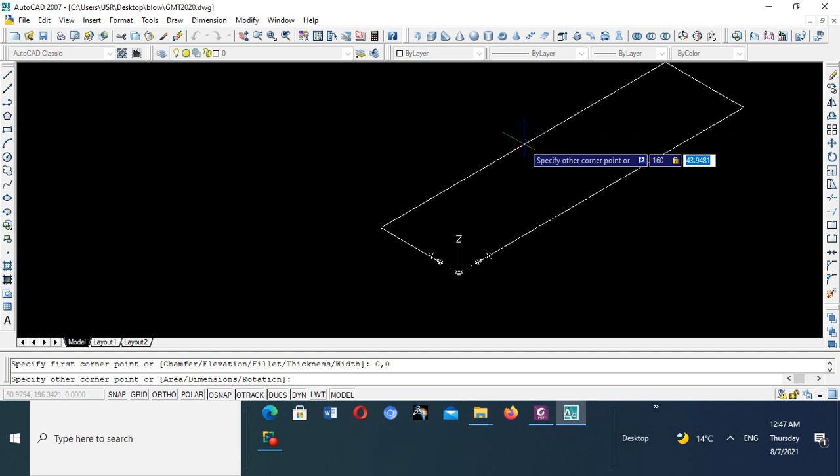Then what is our other corner? It is 160 by 70. That is the other corner. There is your rectangle, right?

So we don't use any 3D command, we just use 2D commands, because this semester we are learning only 2D. So check, you will come to Line, draw a line here. You click Ortho on to make sure you pick your views easily. And here our height, what was the height? Let me check again, the height is 60. So here I write 60. Enter, right? Then I can come out of that command if I want.

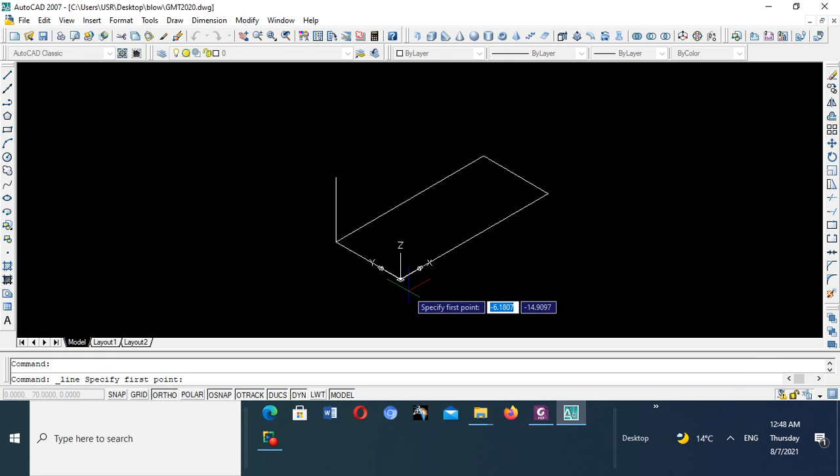I go again to Line, come here, another line in Ortho, 60. Enter, right? Come out of that line, then here again another line, so many ways of killing a cat. 60. And you know, when you practice, you learn more efficient ways than what I'm teaching you. Here another line, what is its length? 60, right? So we've got this, so we can join them.

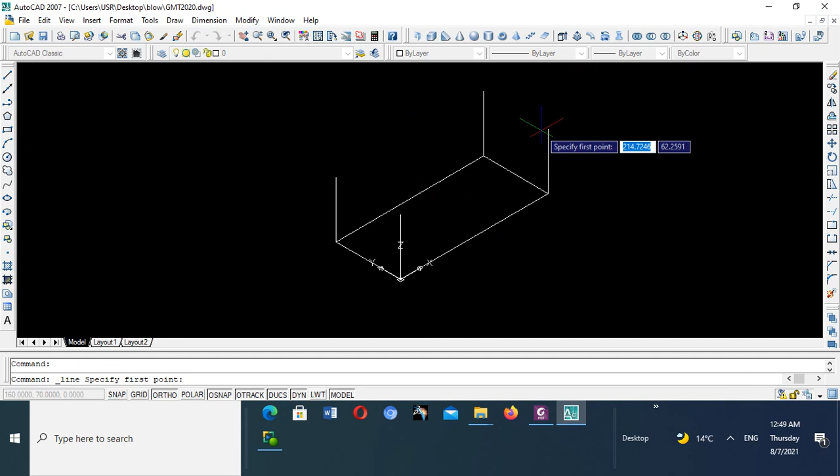Join this line, we join it to that line, join that line, ortho on that line, that line. Then we've got our isometric box, right, which measures 70 by 160 by 60, which is this one.

Correct? Now we want to draw this top view on the top of the isometric box. So we start with that, and we just want to evaluate certain key coordinates, like the center of this circle. This is 20, this is 20, this is 20, this is 50, 50.

So 20 plus half of 50 makes it 45. So the center of this is 45, and then this one is 45 from the end. So 45 from 160 is 115. So from there to that center, the circle is 115. You all have a common center in this direction, where it's half of 70.

So we come to AutoCAD, check. Now our UCS, which is called User Coordinate System, which gives us the origin of all coordinates, the 0,0,0 for all coordinates, is this one. So it's called User Coordinate System. There's a World Coordinate System. The world coordinate system is the default 0 of the software. The user coordinate is a choice, a place on your drawing that you want to use as your 0 for your convenience.

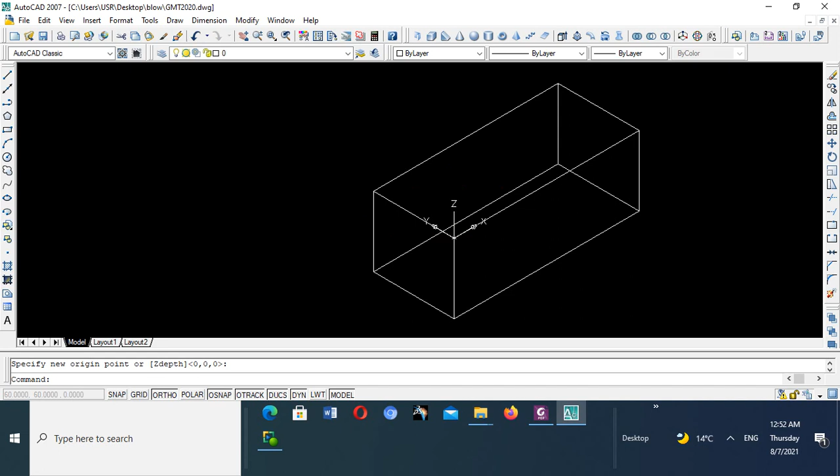So I want it to be here. What do I do? I type UCS in the command line, enter. Then it gives me options of what I want to do. One of them is M for move, enter. Then it says specify new origin. This is the new origin. There I can now start drawing these features. Check now.

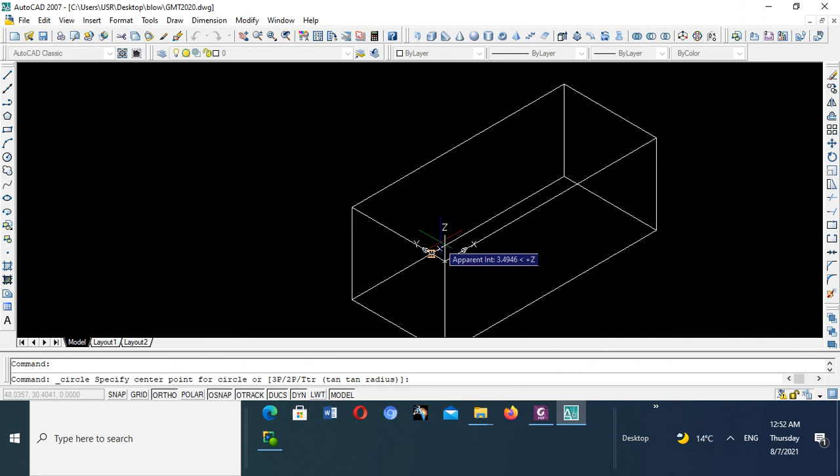I'll go to AutoCAD. I've told you already the centers: this is 45,35, this is 115,35. So we go to AutoCAD, go to circle, and it asks for its center. It is 45, 35. We enter, then the radius comes here. It is 25. Enter. Are we correct? Yes, we are correct.

Then we draw the second circle, which is 115 from the origin in terms of x, and 35 from the origin in terms of y. As taught before, when writing coordinates in AutoCAD, you click circle and write the coordinate of the center point. You write the first coordinate, x, which is 115. Then you press comma, so it gives you the opportunity to write the second coordinate, which in our case is 35 in terms of y. Then you press enter and it goes there. Then your duty is just to write the radius, which is 25.

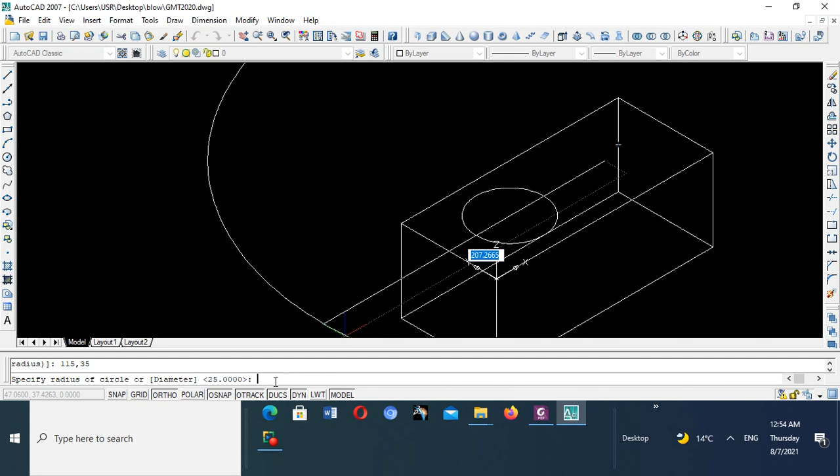You go enter, there is the second circle. But you find out that this circle is forming the top circle. When viewing these things in isometric view, you should see that part to show that it's a through hole. So we must draw again these two holes, which are offset from that top layer of holes, offset 20 down to show that it's a through hole.

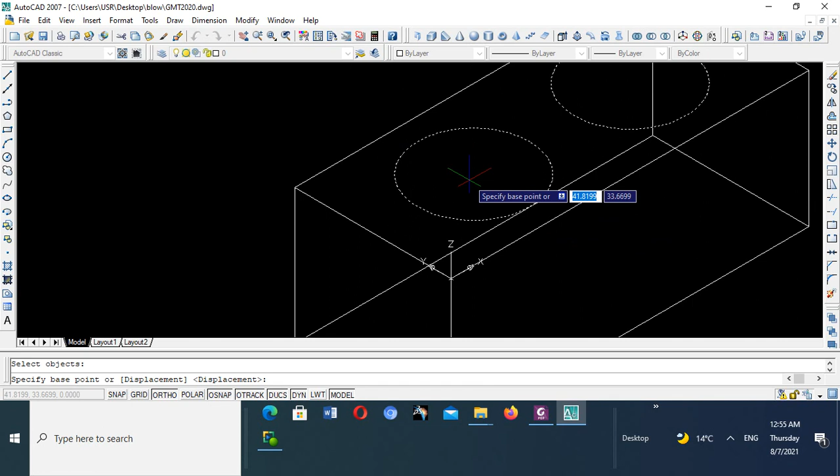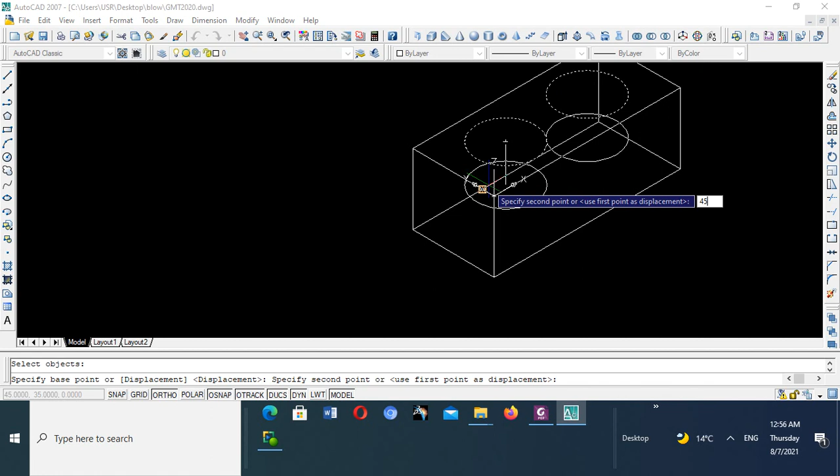So we come to AutoCAD, take this, we say copy, copy this and that, and say enter. Then it says specify base point, the point of reference. It's not picking this one - why not? We do the center of this one. Okay, you can pick the center. Now it's come to this center. Then second base point - we wanted ours to come down here. In terms of x and y, the base point does not change, so it will be 45, negative... 35. The z now is changed to minus 20.

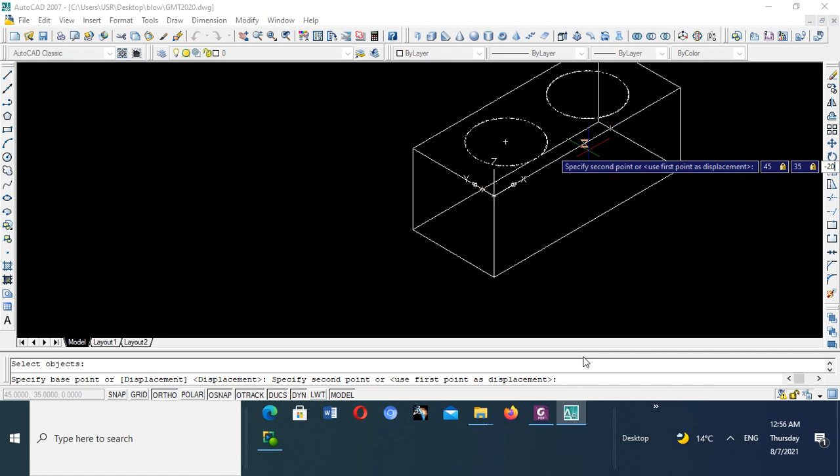Enter. There is your... then you say escape. There are your circles, which have been offset from the original position.

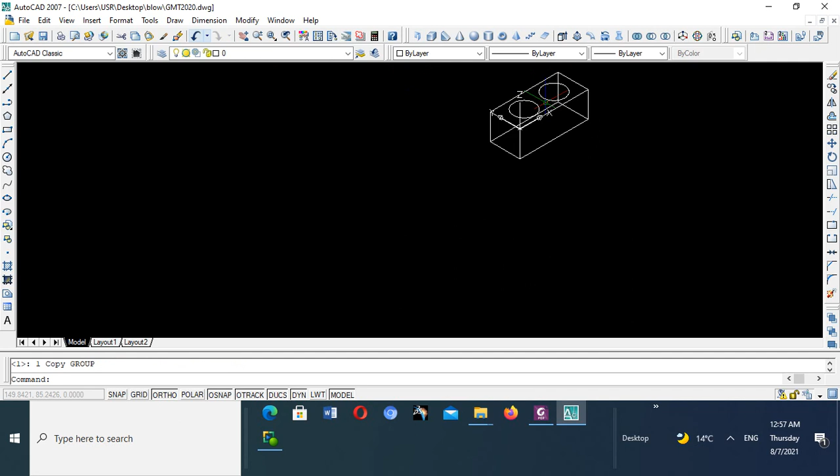Let me undo that so I can start again, so you can easily see what I'm trying to say. I want to offset that, I want to copy that. How do we copy? Let's go one by one. I want to copy this, enter.

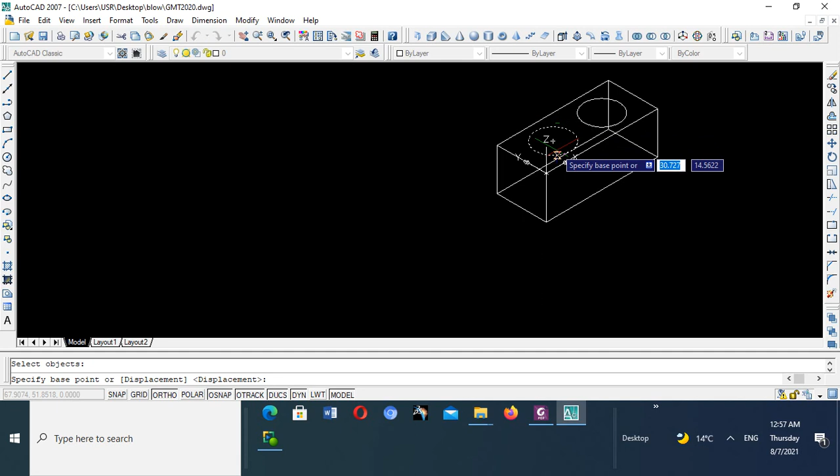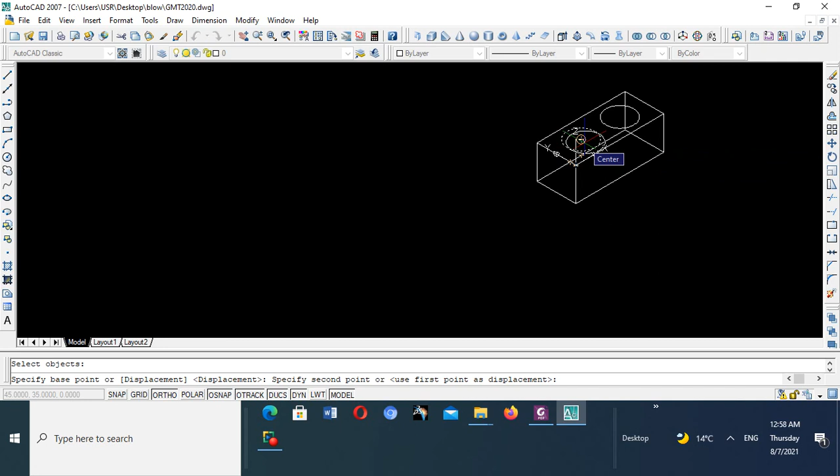Then we want to do the displacement, the point of reference is this one. Then we want it to go down to the new second point. So we specify the second point, going down. We specify second point in terms of coordinates, the new coordinates of the point. So the displacement must be 0... no, displacement, so it will be displacement second point, or use first point as displacement. So second point will be, in terms of x, it is 45. In terms of y, it is 35. In terms of z, it is minus 20.

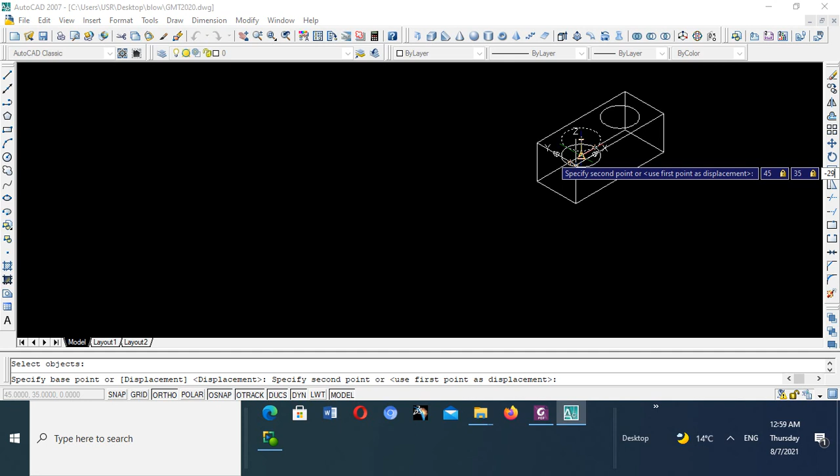Is it gone in that direction? No. Let's give it a try again. Let's see, give it a try again.

Now the best way to draw these two circles - this one we've already drawn, these two. I want to draw this one and this one. Now the best way to do that - so many ways of killing a cat. I told you, you can come to AutoCAD and move your UCS so that it is 20 millimeters below, because we know that this second series of circles is exactly on this edge, which is 20 millimeters below. So we come, this is our UCS, this is our 0, correct? So we want to move it in the same position as far as x and y is concerned, but drop z down.

So we go UCS, enter, move, enter. Then you specify new origin. So you go x is 0, comma, then y is 0, comma, then z is minus 20. You go enter. See, now it has gone down. This one is easier to work with.

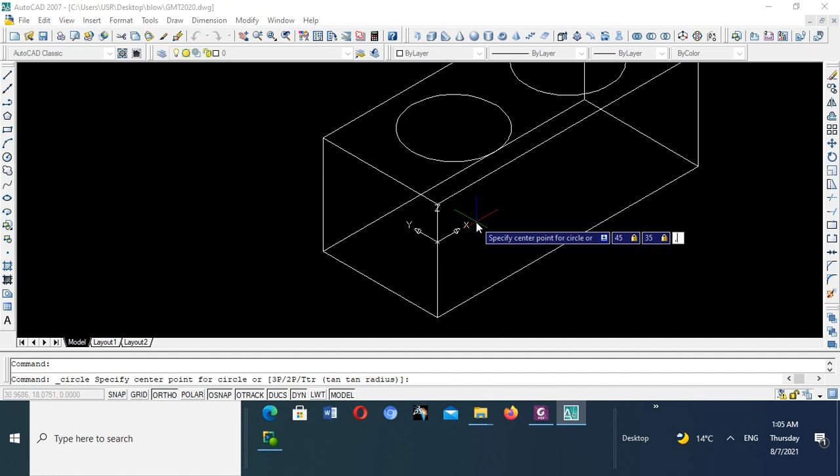It's 0. And there is your circle. Now we want to enclose it with radius 25, and there is your second circle. Correct?

Right, check now. You want to draw this circle we've drawn. We want to draw this one. This we've done, we want to draw this one. So we go to AutoCAD, go again to circle, then want to put coordinates on it.

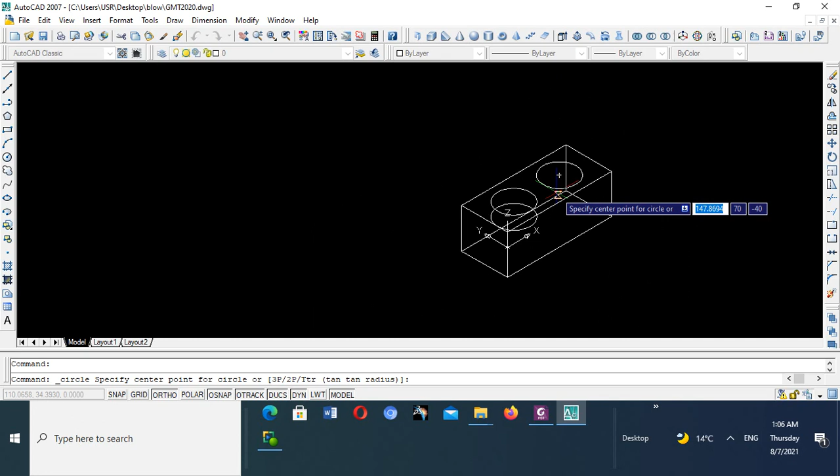What does it say? It says specify center, it will be in terms of x 115, comma, then y is 35, comma, then z is 0, enter. Then we want to specify circle radius, which is 25, enter. These are our two circles.

So two series to show the top part of the circle and the lower part of the circle, which makes it a through hole, this part here. The top part, lower part, making it a through hole, this hidden detail here. See this here again, this hidden detail is those edges, right? Anyway, you hide detail from your manual drawing.

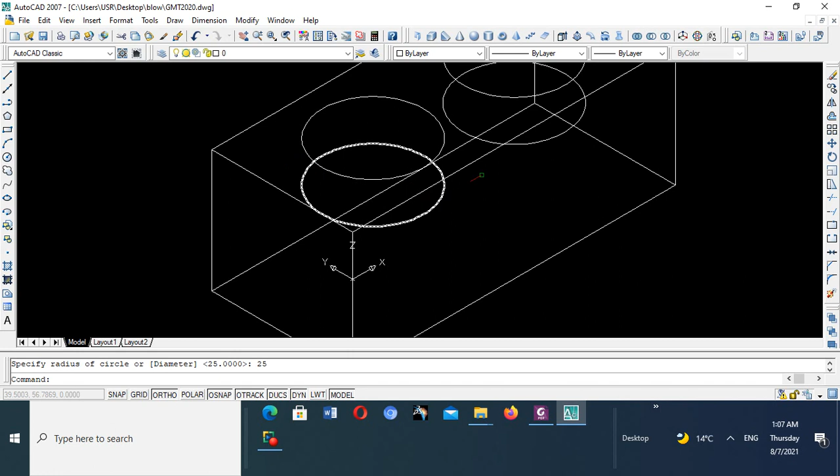So you come to AutoCAD. So you see, we don't want this part of the circle. It's not visible in isometry. This part only visible is the one inside. So what do we do? We should trim off that.

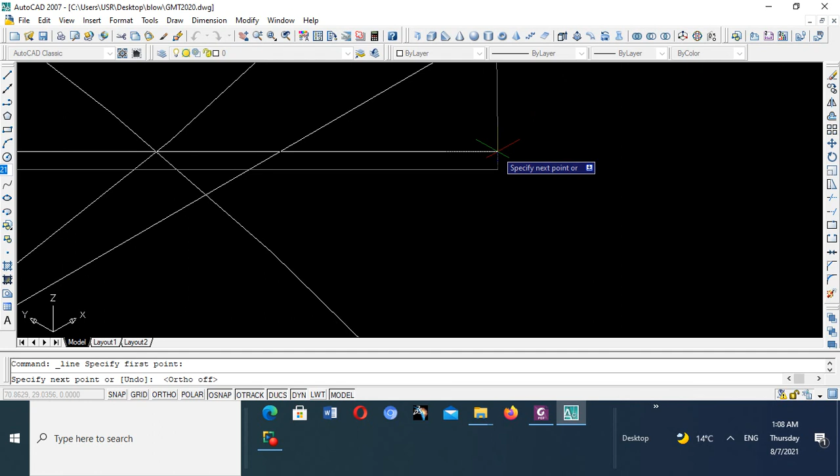So the trick to trim off that, you can just draw a line here which crosses from this point. It crosses - we put ortho off - it crosses over this junction here. You see why I put that line? I'm going to use it very soon.

So I only want to keep that part of the circle, which is the inner part. This outer part is not visible, so I want to delete it because it's not part of an isometric view. So we go to trim entity, and then they say select cutting edge. This is the cutting edge.

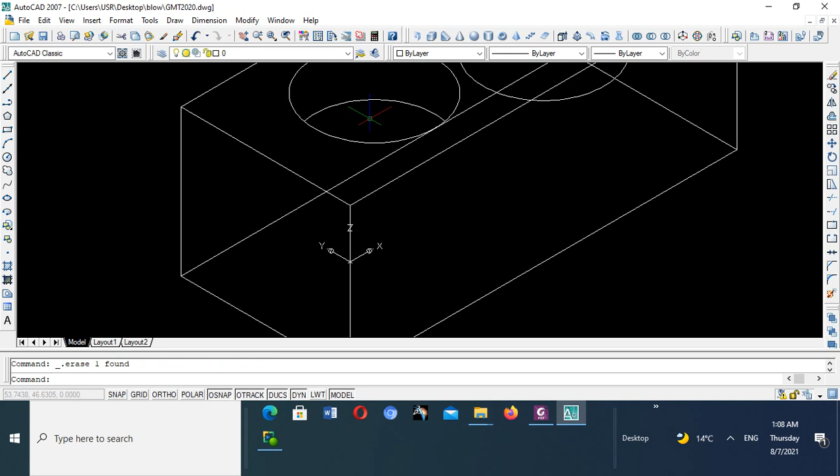Then we say enter. Then select what you want to trim. This is what you want to trim. That's nice, so we have removed it. So this line, we don't need it again at this time. So you see your circle has come out nice.

Very nice. Alright, same thing will come here. Just draw a line. This line is going to be our cutting edge, just need it for cutting. After that, we remove it. It must exactly cut past this.

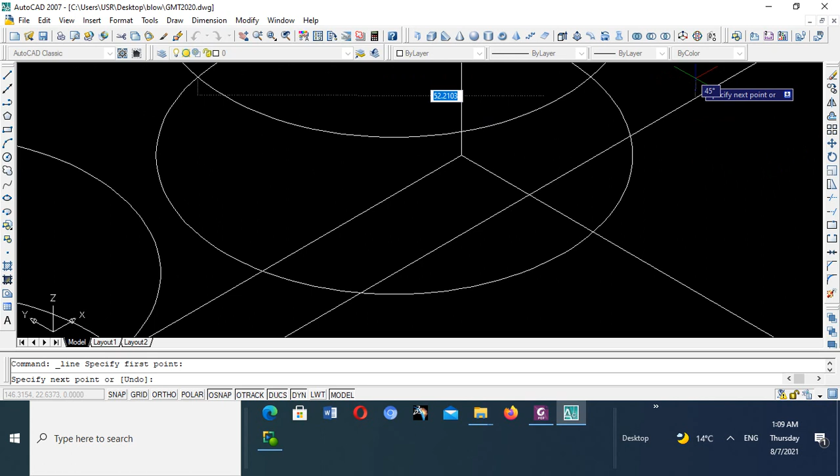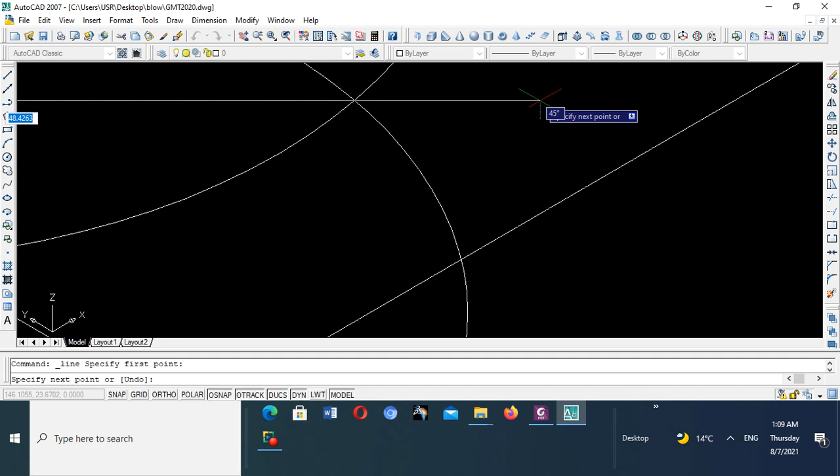Is it cutting past? If it doesn't cut past like what it has done, we should delete it. It won't save us any good. We should delete it, delete it, and we draw a line which really cuts exactly past. Right? This is our line cutting. Let's cut past our point of interest, right?

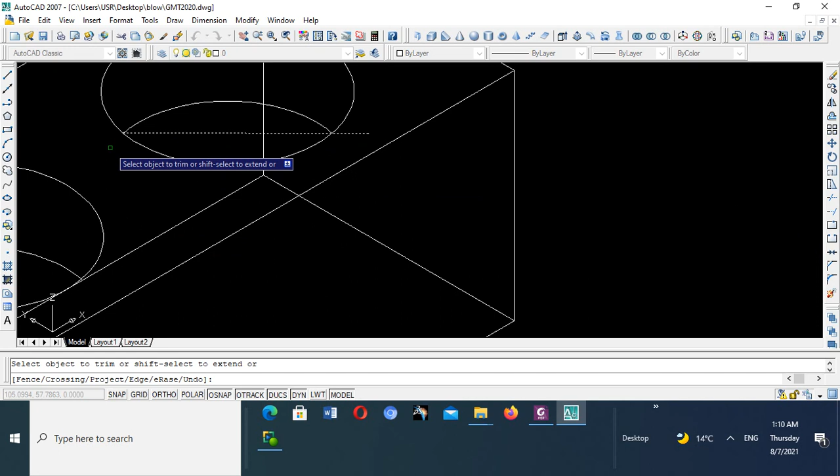Good. Then what do we want to do? We want to trim this outer, which is this one. We want to remain with that one, that one. So we go to trim, and we say select this, this is the boundary, cutting edge, and then you want to cut this. Nice, then you want to remove this, it's not part of our drawing. So we zoom. Nice.

Then also you want to believe with me, this part of the rectangle is not visible. That part is not removed, so we remove that. We remove, start with this one, we remove it. Very easy to remove, it's not visible in isometric. You can see here, those edges are not visible, so we want to remove them.

This is one entity, so we want to explode it. I taught you how to explode. Now we can remove this, delete. We can remove this, delete. We are nearly home. Nice.

Then we want to draw features on this side, which is this - a hole-like part of the bracket, which forms part of the bracket, just a through opening in the bracket. So we must draw these lines, then later we trim them and leave out necessary lines. So we want to draw in this front plane.

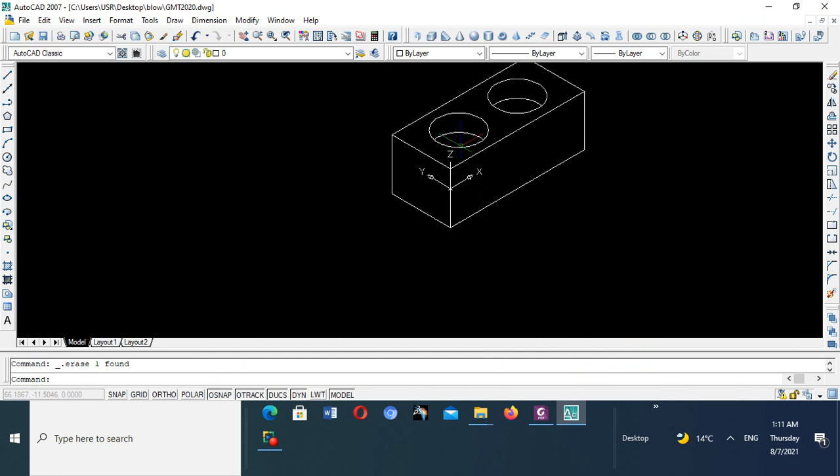So we have to bring our UCS so that our XY is in this front plane. So check how we do that.

We go to UCS, enter. Then it says specify new origin. You specify this. Then it says select a point on x-axis. This is my x-axis. Select a point on y-axis. This is my y-axis. Check now. My xy plane is this. This is my 2D drawing plane.

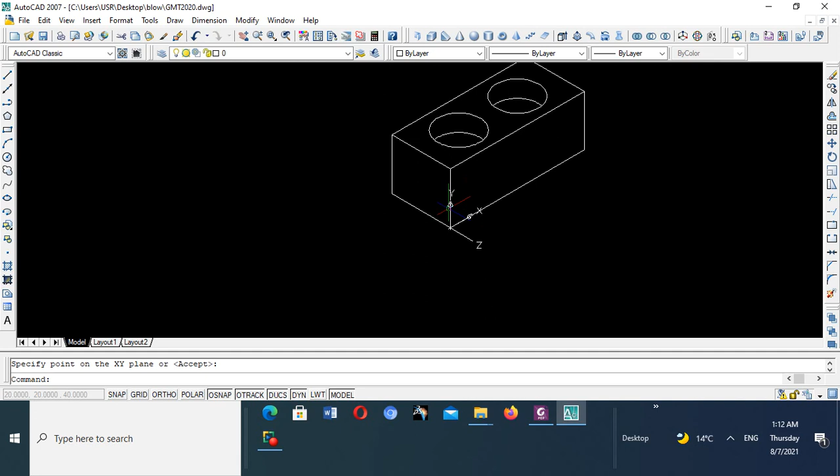XY plane, before it was this, now it is this. So I will repeat the process. You see where my XY plane was. Now I want to move that plane, so I click. You watch carefully. I type UCS, enter.

Right, specify origin. This is the origin. You see my XY plane where it is, but I want it to be on this vertical plane, it's on that horizontal plane, the base. So it says specify a point on X. This is my selection. Point on Y. This is my selection. There is my XY plane.

Now I can draw in that one. Check, I can draw in that plane now. See, that's how my circle has become, because of that selection of the new drawing plane.

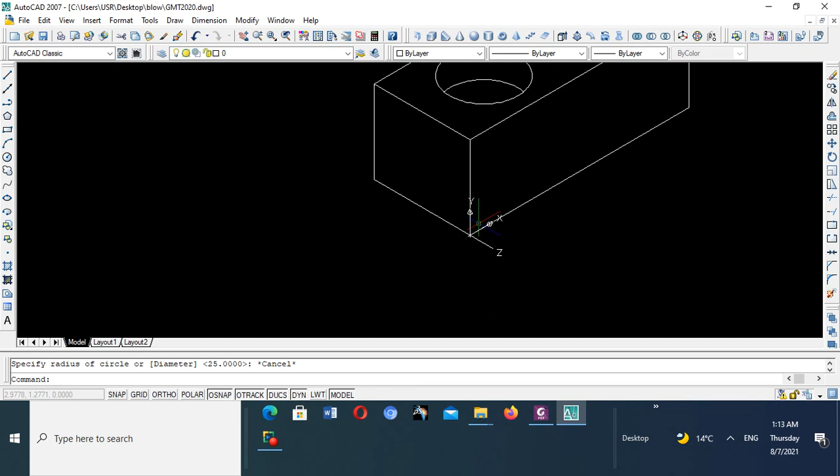Now I want to draw these lines, and later I trim them. You watch. This is 20 mils, this is 50, this is 20, this is 50, this is 20.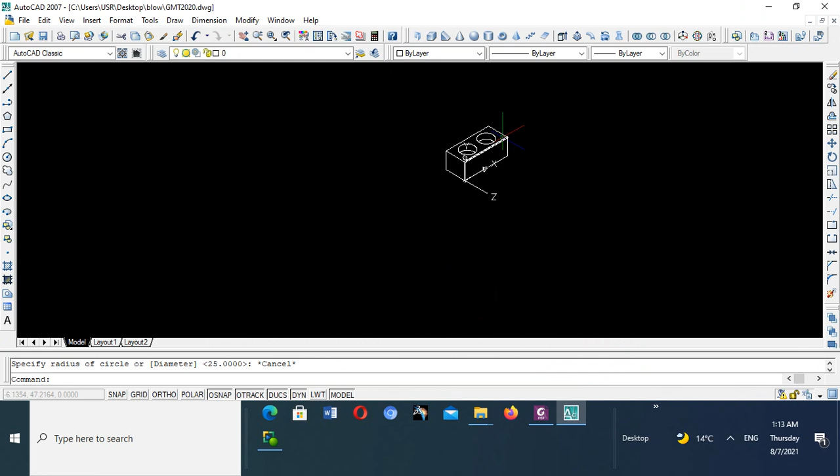So I will just offset. I come here, I choose this single line, I go to offset command. It says offset distance 20, select this, that. I come out of that. Then I go to offset again, offset distance 50, I say enter, I select this. Then I come out of that.

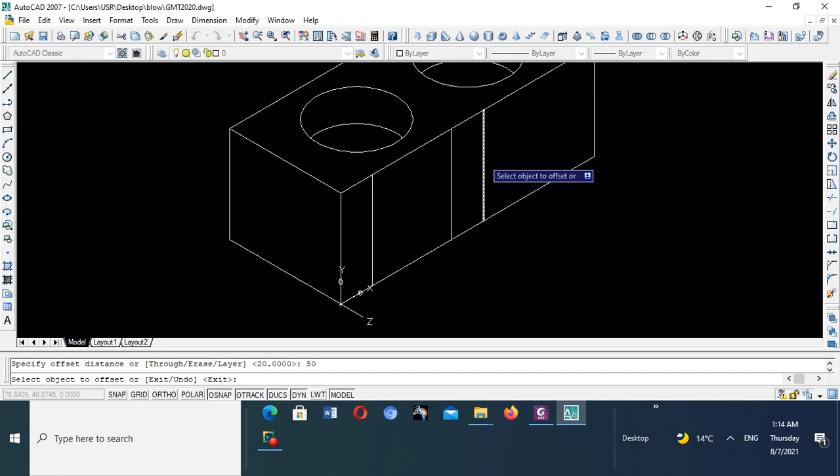I go again, offset distance 20, and I go from there to there. Then I go again, offset 50 this time, I go enter and I press this to that. Then I've drawn the necessary lines. I will trim them later.

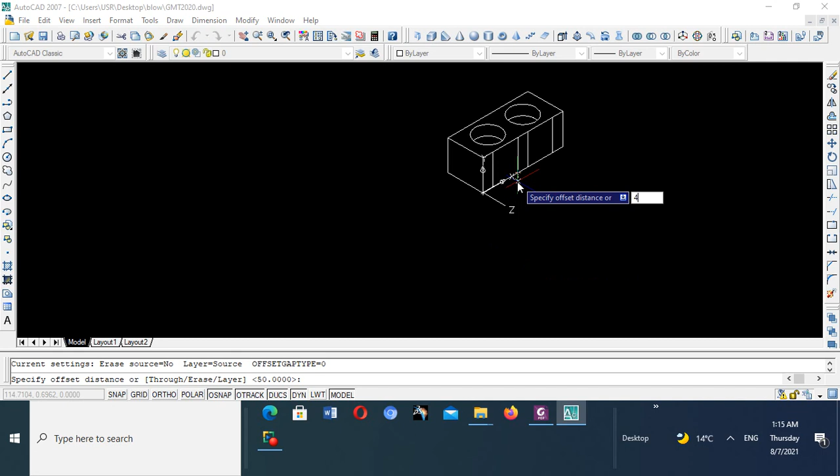Then I want to offset this line. So I go to offset command, offset distance from the bottom here to there must be 40, because this is 60 minus the 20 makes it 40. So I come to AutoCAD, offset distance is 40. Then side, this side, there is my lines.

So I trim off all those which I don't want. Right? All this stuff I don't want, it's not part of my drawing. So I will go to trim.

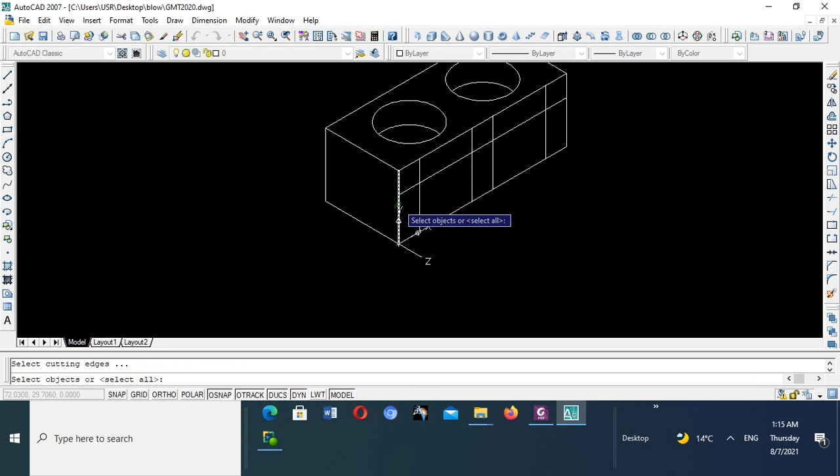Then which are the cutting edges? First of all, I want to trim the horizontal lines that are supposed to be trimmed. You will see. Then I go enter. So which one do I want to trim?

I want to trim this, I want to trim that, and I want to trim that. Then I come out of trim. Can I trim this? Yes. I can also trim this. Yes.

Then I come out of trim. Then I want to trim that. I don't know if I'll be able to do that. Then I go to trim. This is my cutting edge, this becomes my cutting edge. Then I go enter, and I want to trim this one.

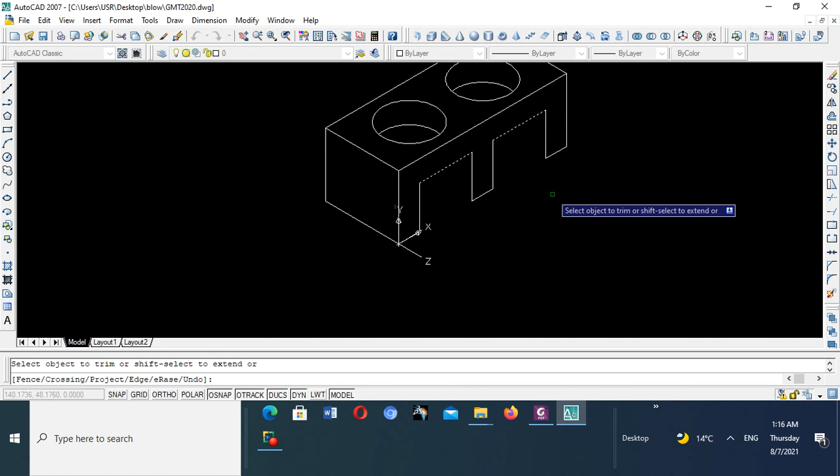I want to trim that one, I want to trim that one, that one. Then I come out. Nice, very nice. Then if it's isometric, this edge should be visible.

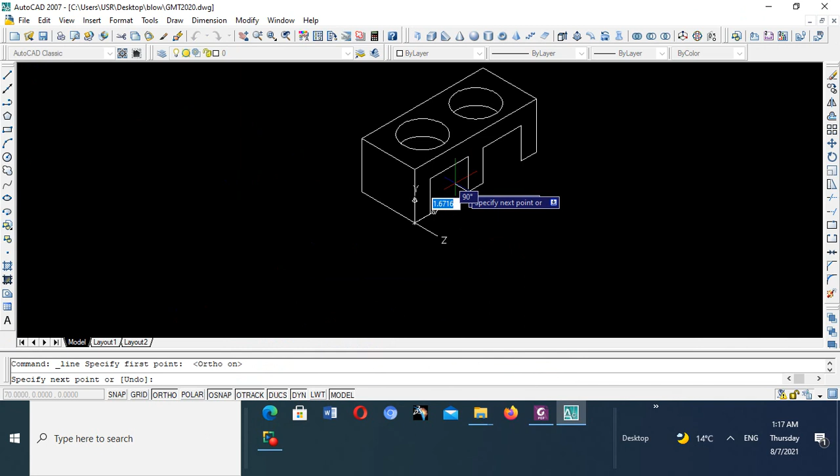That edge should also be visible. So I just go to AutoCAD. I pick a line, I go ortho on. And I draw this line. It must cross where it interferes with this. That's why I click it. Right?

Then I come again to line command, and ortho must be on. I click this where it meets with this, or even if I don't want to draw it, I can just go ortho, it goes there, so it does not disturb my accuracy.

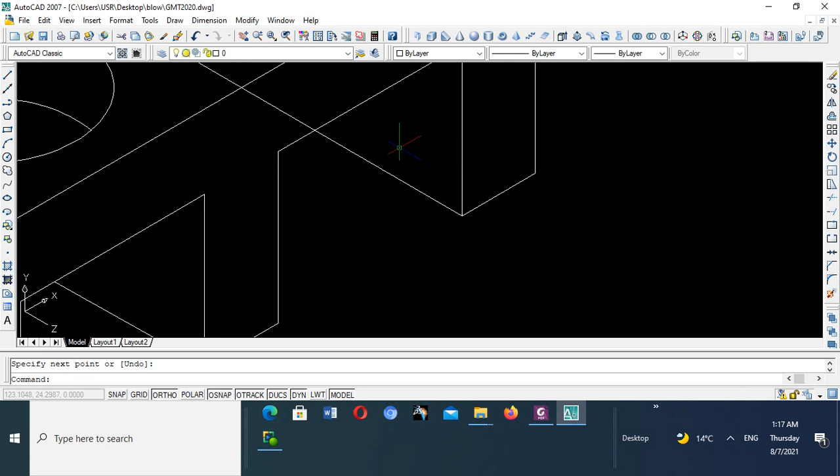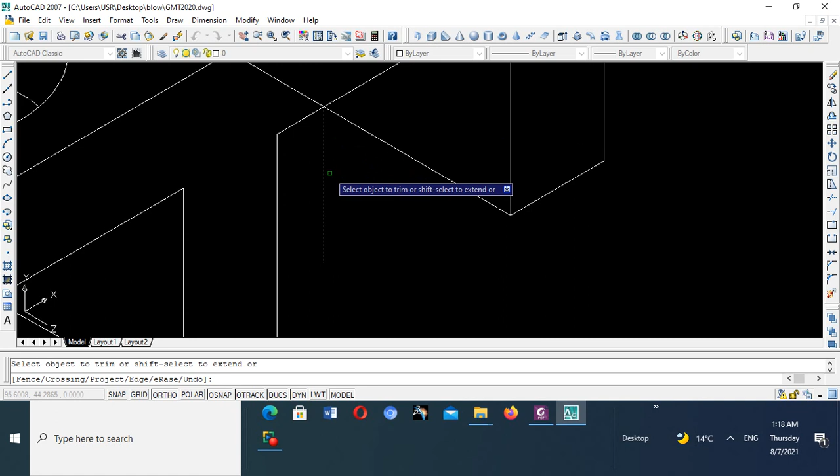Now if I want to trim it, I can just draw a line here. So draw a line, yeah even as it is, then I can trim this line. Let's try trim. This is my cutting edge, and this is the thing to trim. No, that one is not coming up, maybe because it's not crossing it.

So we have to make sure we draw a crossing. We put ortho off, right? We just want to use this line for trimming. Hopefully this time we will succeed. This is our trimming edge, and this is what I want to trim. Again, it's not coming up.

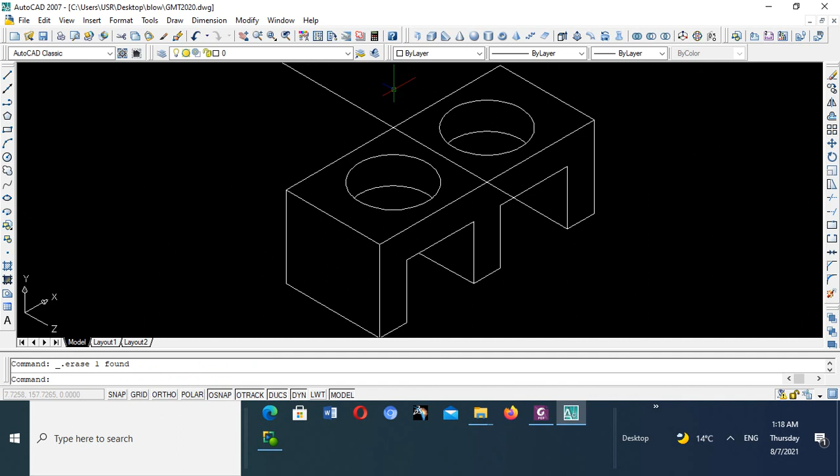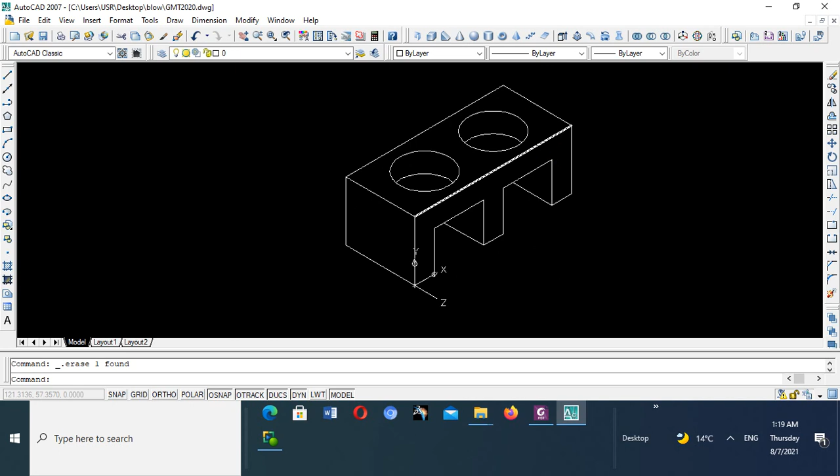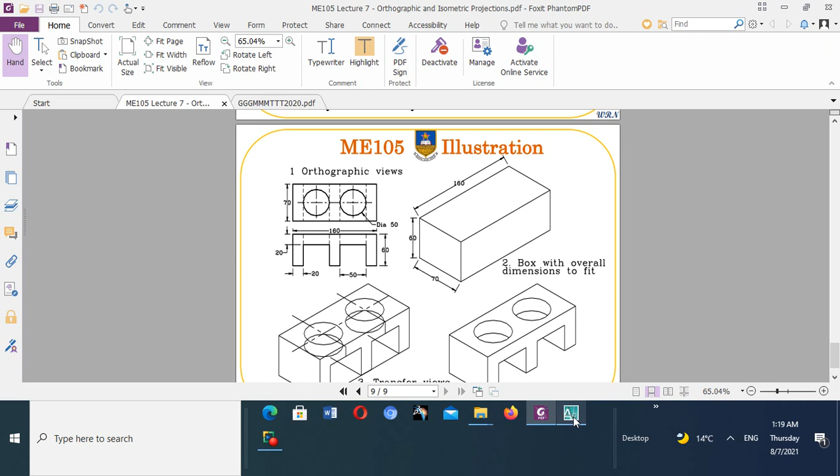So the other way, which is easy, if you don't want to try to find a trimming edge, you just draw another line which starts from there to there, right? Then you come and pick up this line and you delete it. That one remains. There is your isometric. Check, this is our isometric, converted from this orthographic to this isometric without using any set squares, without using any 3D, just 2D work. Check exactly what it is, right?

Now if you want to put it on a template, you can draw your own template. I will try and upload a tutorial on how to draw your own template, or you can choose the default one given. So you come here, and then come to layout 1 or layout 2, and you right click and you say from template, correct? Then you choose the template, and that's fine. I like the ISO ones.

I've already developed mine here. I like the ISO ones, ISO A3 color dependent. Then I say open, then I say okay, and check that the template is there.

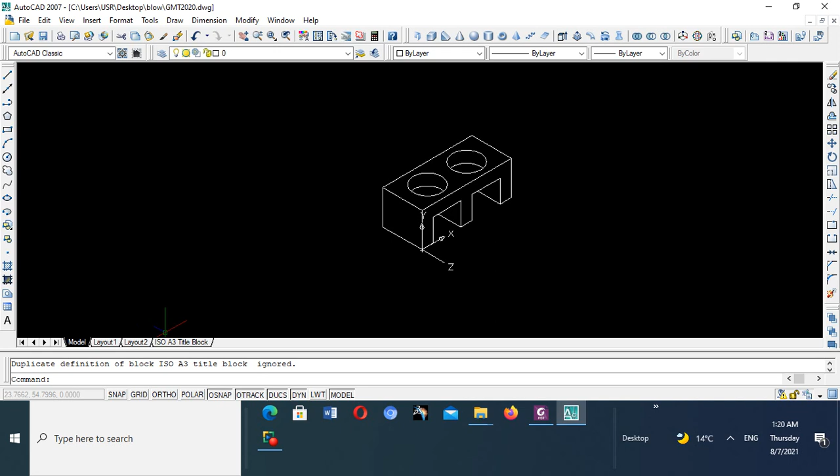So if I want to put this drawing which I have modeled into a default template, I've already taught you how to bring the template. So you click on the template, there is your template. See, your drawing is partly appearing. You click inside, you see your drawing coming up inside, right?

But it's coming in plan view. We want it to come in isometric, so we go to views, 3D views, southwest isometric. There is your drawing.

If you want it to come in another view, go to 3D views, and you want it top, it will go top. But if you want it southwest isometric, you come to southwest isometric.

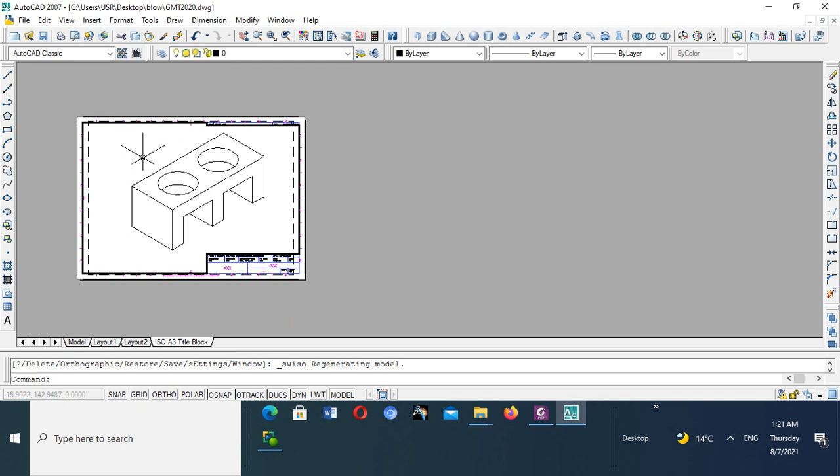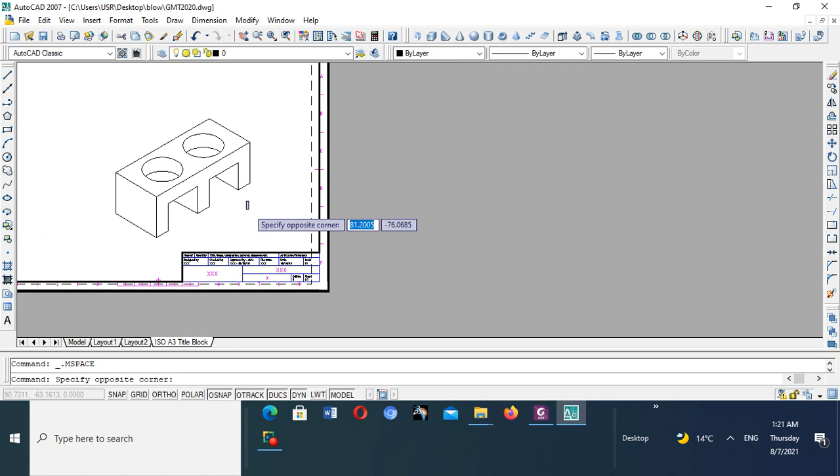Now if we click inside the drawing, this black margin is bolded, and we can zoom in, zoom out the drawing, and position it where we want. If we click outside, we zoom the whole paper, the whole template. But if we click inside, we zoom only the drawing so we can position it. If we are satisfied, click outside, and we zoom the whole paper.

Very easy. Then when you double click again outside, you can now edit the attributes of your default title block. Check now, file name, I put GMT - that's the file name, now it's changed. See, it's already changed. Drawing number, two.

Right? Then we go down, we change all the attributes, check the 'by' - come here, we have checked, maybe it's engineer Mshonga. Engineer Mshonga has changed it, has checked it, right?

Go down, change all our attributes, sorry, checked. Then designed by - maybe it was engineer Tigere who designed it, correct? Right. Then the date, you can put a date, today is...

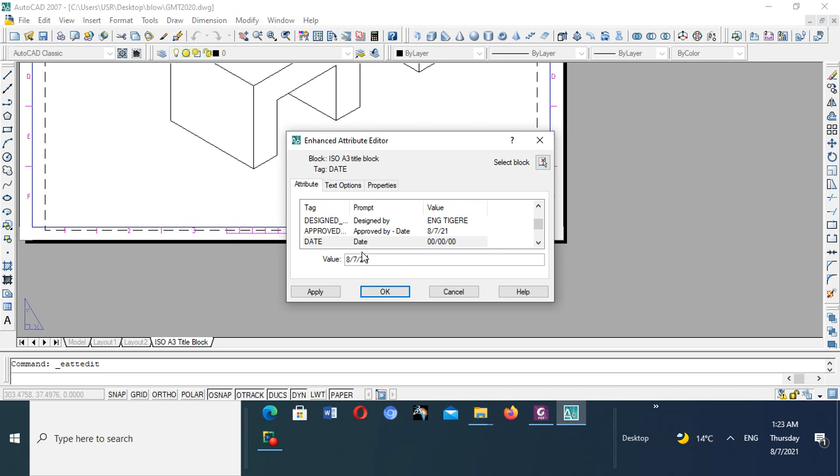8/7/21, right? Date changed. Come down, put approved date, approved date again - put anything you want there in the date, 8/7/21, right, date. Any title - what do we call the title?

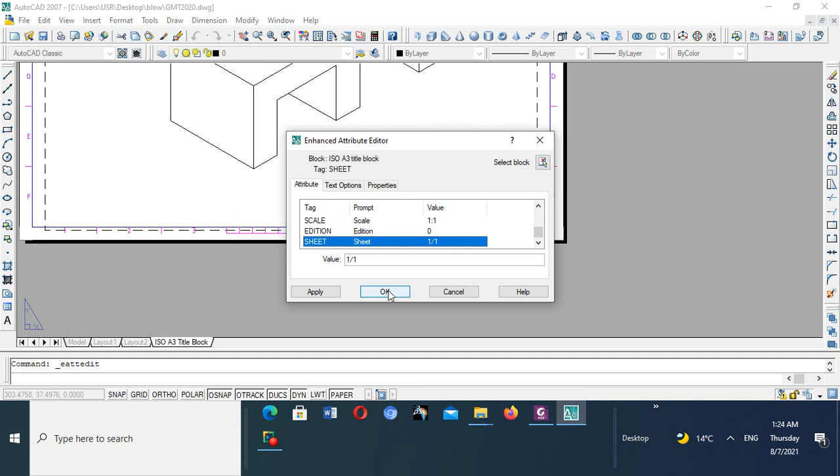It's a bracket, right? Then scale 1 to 1, edition 0, sheet 1 of 1. Attributes finished, apply, okay, check - there's your attributes according to how we have changed it.

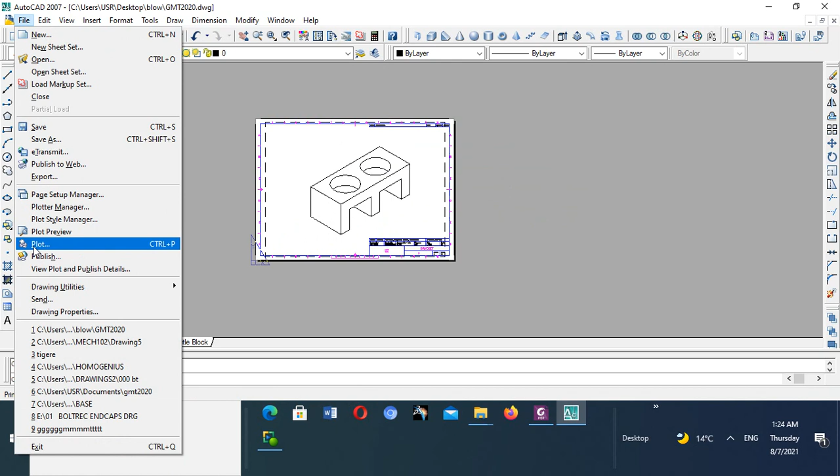Right, now we are satisfied, so we want to print this, so I will teach you how to print. You go to file, then you go to plot, and then you choose your printer.

Now I'm not connected to any printer, so I can just choose PDF - PDF is also a type of printer. Then fit to paper, then this is our paper size. If you want A0, you can change it - A1, A2, A5, A3. Is there A0, A1? No, so I take A3 size paper.

We go to properties, you find some more features - some critical features are here on custom properties, on layout. Sometimes you might want it as landscape, then this is our units, you can change to millimeters, then these are the chief parameters that must be changed.

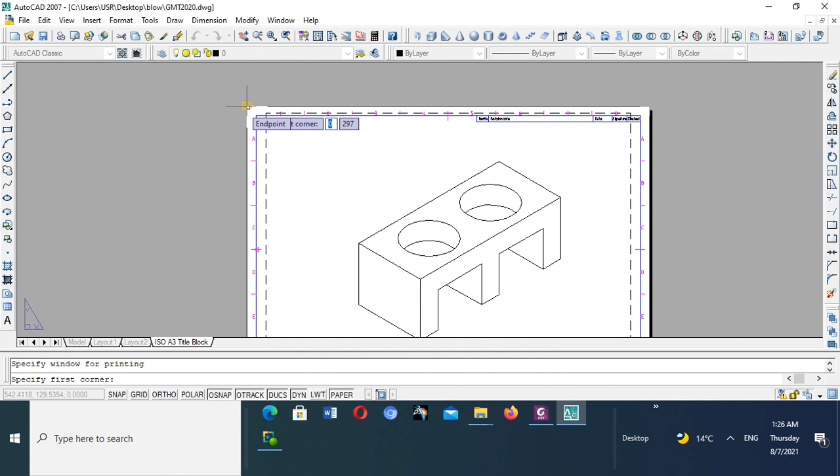Then you go okay, okay, okay, then for what to plot, you can select by extents, by window, by layout. You practice some of this. You check it window, it gives you what window you want to plot. If you want to plot all this, select one top corner and one lower corner.

Then if you want to preview it, this is what is going to come out when you print. If you are satisfied, you press escape, then you say okay, then you choose where you want to save it.

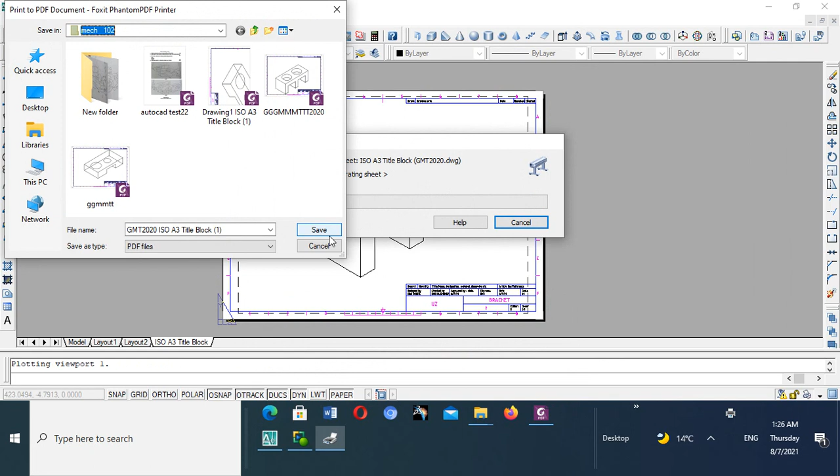I want to save it below, and I will call it GMT2020 - that's the name. If I say save, it should start going there. Then I say save - there is my drawing, right? There is my drawing.

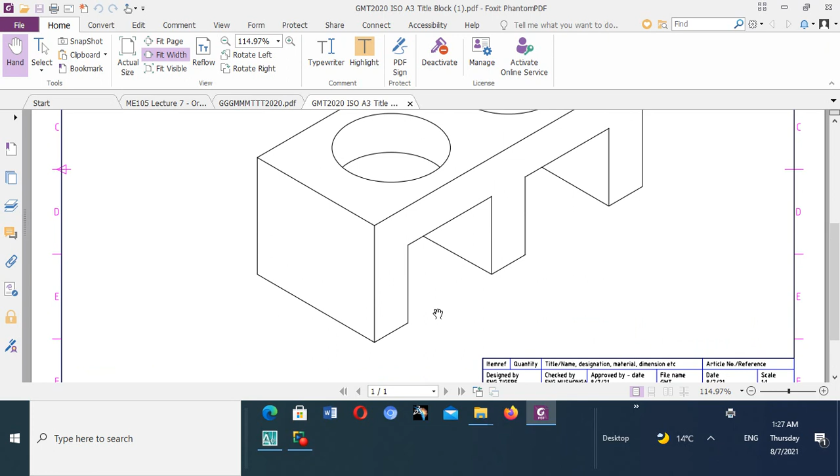This is nice, isn't it? Let me bring it smaller. So when you are going to print it, it's going to come out exactly like that - what you've written there is what is going to come out.

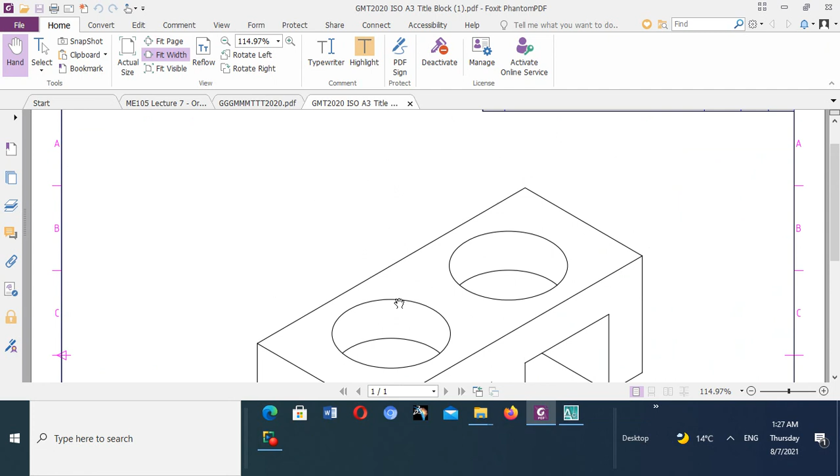All our attribute additions. So with this, have a go at this, practice this, and then do your work and your assignment too. I will send it, I think just now, together with this tutorial, so you practice that to prepare you for your exam.